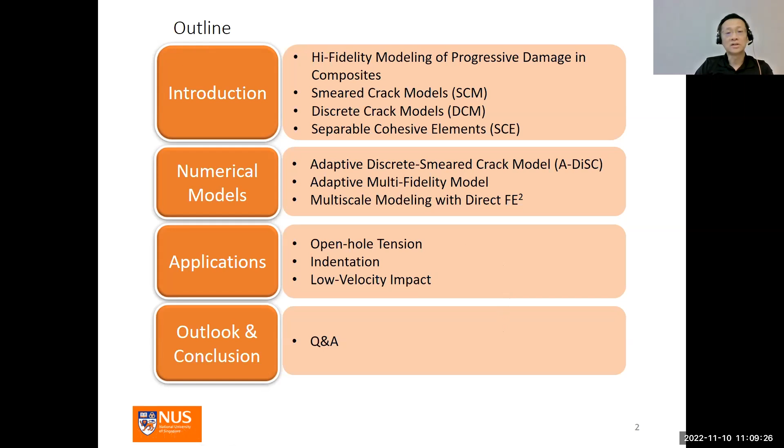Throughout the talk, I will use various examples for verification of the results and the modeling, using examples in open hole tension, static indentation, and low velocity impact of composites. And finally, I will conclude with the outlook and accept the Q&A.

Now, if you look at a typical notch composite specimen, such as an OHT specimen like so, you'll find there are combinations of distinct matrix cracks, diffused, very small but numerous micro cracks, as well as delaminations and possibly fiber damage. Clearly, to capture the physics of these failure modes presents a huge computational and modeling challenge.

If you read the early literature, let's say in the 1980s, on notch composites, you will come across criteria such as point stress or average stress criteria, which are essentially empirical criteria, not really based on much physics. Therefore, for every change in laminate stacking sequence, or an OHT specimen, you will have to vary the critical stress and so-called characteristic length. So for thousands and thousands of specimens, you may have very different criteria. Clearly, this is not a satisfactory situation.

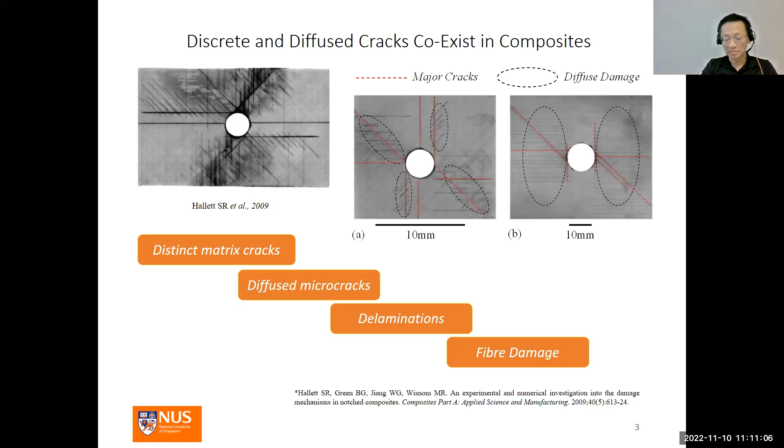Fortunately, our understanding and modeling of progressive damage has improved considerably since then. Our models have also evolved in sophistication, as we shall see.

Most high-fidelity modeling of progressive damage is conducted at a meso or ply level scale, as shown in the middle here. Of course, you have the larger scales at the component and structural scale, the macroscale. And these models are usually modeled using shell or plate elements.

At the microscale, you can explicitly model the fibers and the matrix material. However, these are usually of the order of micrometers.

We can resort at the mesoscale to either discrete or smeared crack methods. The discrete crack models cracks explicitly by splitting or partitioning the finite elements, but that comes with a high computational cost.

Examples of these include the XFEM, the phantom node method, the augmented finite element method, and something which we developed with a group here in collaboration with Professor Pinho from Imperial, the floating node method.

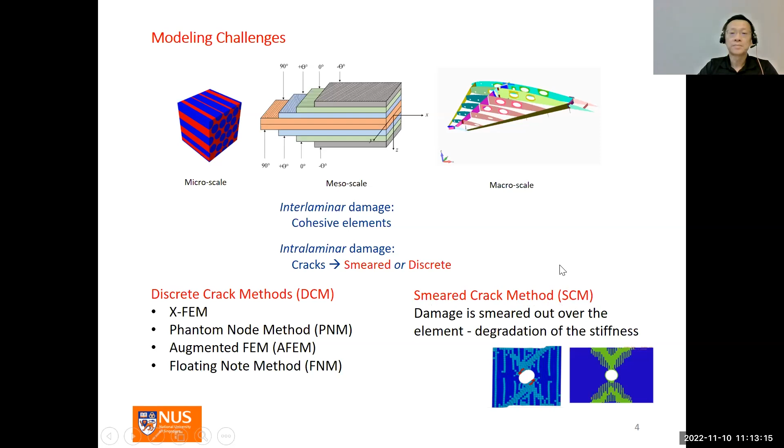Now, the good news is that much of the physics of failure at the ply level scale can now be modeled fairly accurately with high fidelity models such as these.

This is an example where the laminate is subjected to impact and then subjected to compression afterwards. Here, the two specimens are quasi-isotropic in the layout. The only difference between the two, on the left and the right, is the order of the stacking sequence.

The laminates are first subjected to low velocity impact, and then the damage is retained in the model. Then the boundary conditions are changed such that it is subjected to compression.

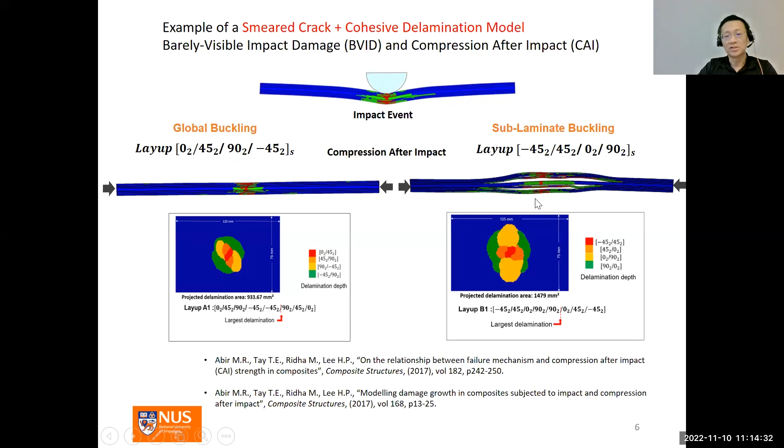So depending on the layup sequence, the laminate on the left fails through global buckling, whereas the laminate on the right fails through sublaminate buckling. And these results can be corroborated with experimental data.

With the development of the discrete crack technology, we can further improve accuracy and fidelity of modeling. Here, we developed the floating node method to partition not only the brick finite elements, but also the cohesive elements.

The floating node method is largely due to the work of my ex-PhD student, Dr. Chen Boyang, who is now a professor at TU Delft. And the work on the separable cohesive elements is largely due to my ex-student, also Dr. Lu Xin, who is now with Shanghai University.

So imagine a finite element model, let's say here on the top left corner of a composite laminate. Upon damage initiation, nodes are seeded onto the brick elements to simulate matrix cracks by partitioning the elements. So the elements here, for example, a partitioned element in this plane, with this will be the matrix crack. The method is called floating node because the nodes float before they're seeded and assigned to an element for partitioning.

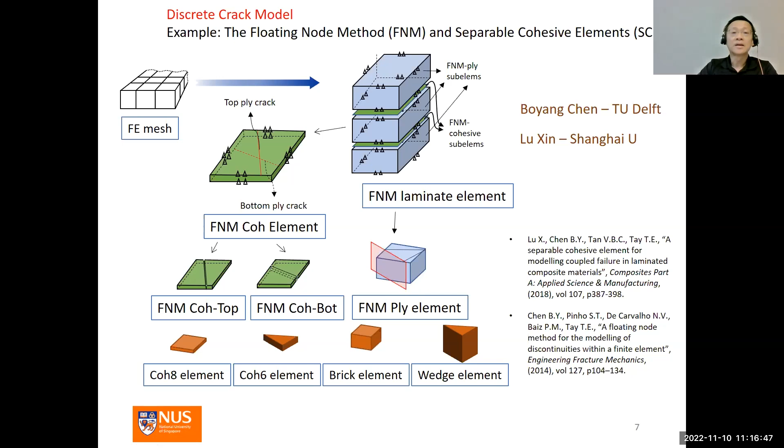The floating node method was successfully used to model cracks and damage in both notched and unnotched laminates. Here, the delamination is indicated by the red-colored areas as modeled by cohesive elements, while the matrix cracks are modeled by partitioning the brick elements in the plies.

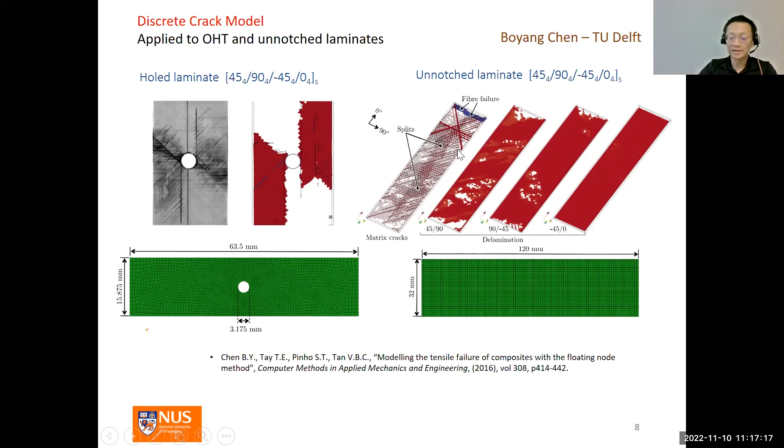We then extended the discrete crack method to model open hole compression. This development involves a geometrically nonlinear formulation, and the work is largely due to my postdoc Jie Zhi, who is also my ex-PhD student. The open hole compression involves an additional failure mode due to sublaminate buckling.

He also applied the code to low velocity impact of composites, shown below here. We can see the classic peanut-shaped delamination pattern and matrix cracks for a cross-ply laminate. We've done it also for quasi-isotropic laminate, but it's not shown here.

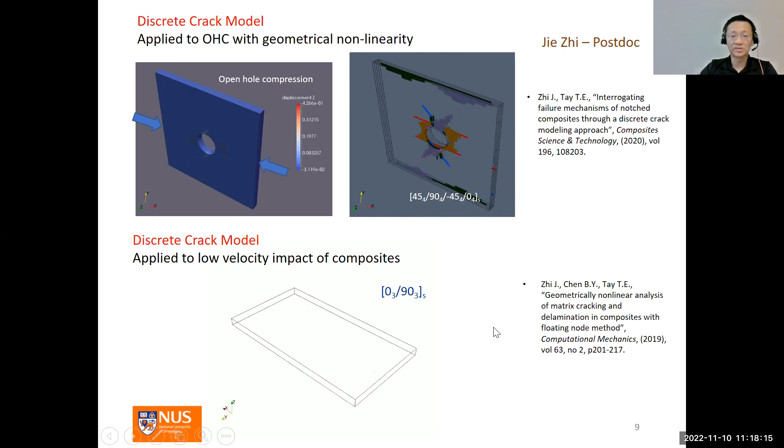So we now have two technologies with different advantages and disadvantages. The discrete crack model is closer to the physics of fracture, but it's computationally expensive, and therefore it's not so practical for application to larger structures.

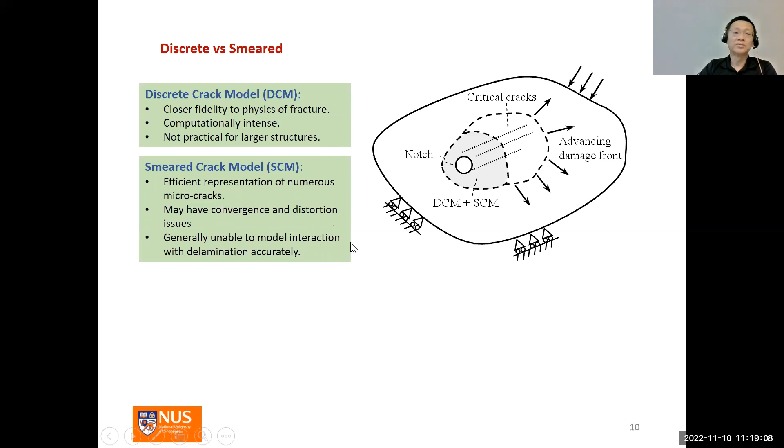The smeared crack model, on the other hand, is relatively efficient, especially when numerous micro cracks need to be modeled. But it may have convergence and distortion issues and are generally unable to model interaction with delamination accurately. So in problems where there is delamination migration, these smeared crack models may not work.

So the idea here is why not combine the best of the DCM and SCM models in a single model. The DCM is only used or activated when damage is actively progressing, and where fidelity to physics is important - it is activated only when the damage is growing. But the SCM, or smeared crack model, can be used when a large number of saturated diffused microcracks are present, or when damage is no longer active and the damaged region can be smeared with reduced stiffness properties.

Clearly, there has to be some criteria for retaining some of the cracks in discrete form and smearing the others. So we call this method ADiSC, first proposed in 2019. The hope here is that it's possibly less compute intensive for larger structures while preserving the fidelity to the physics.

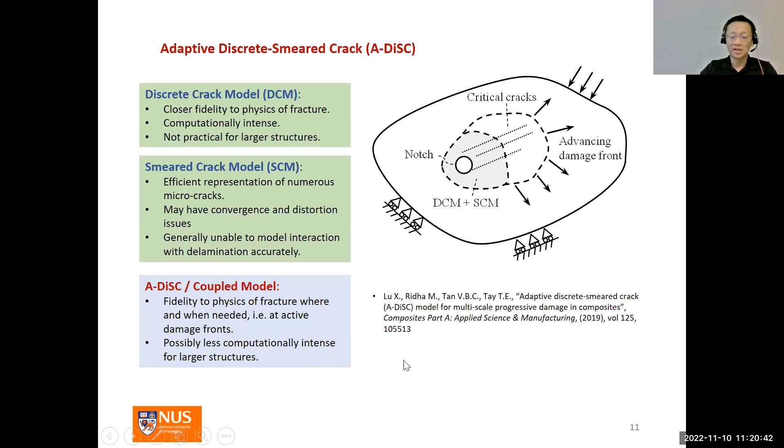More recently, we've extended this idea to include adaptivity with different element types. This has several advantages, and many practical structures are modeled with shell or plate elements.

When failure is predicted to initiate, the surrounding region, let's say, for example, around a notch, may be converted to 3D brick elements, and the discrete crack method may be employed to model the physics of crack growth. When the damage has stopped or reached saturation, the region may be converted back to the more efficient shell elements.

With lower fidelity. So you begin with a shell model, then have a transition to 3D where all the damage takes place, and then when the action is over, you convert the region back to shell. It is hoped that this will improve computational efficiency without sacrificing fidelity to physics.

This work has just recently been published this year. Of course, when it comes to implementation, the devil is in the details, as I say.

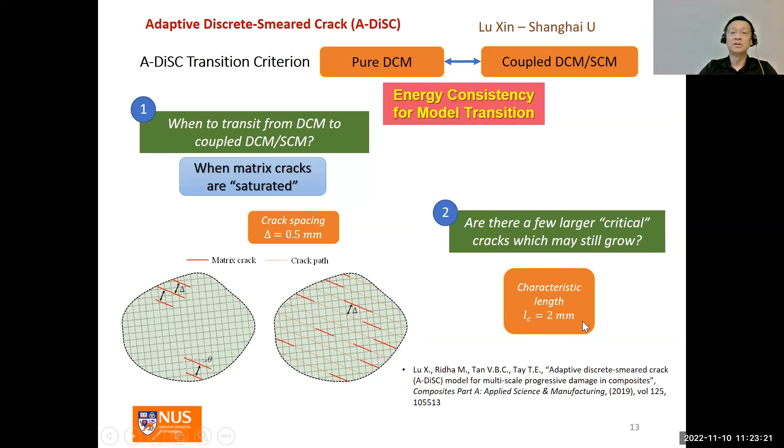So these parameters have been studied in greater detail in a paper. I'd like to demonstrate this approach in an OHT of a quasi-isotropic laminate, for which experimental results are well documented by a paper from Steve Hallett.

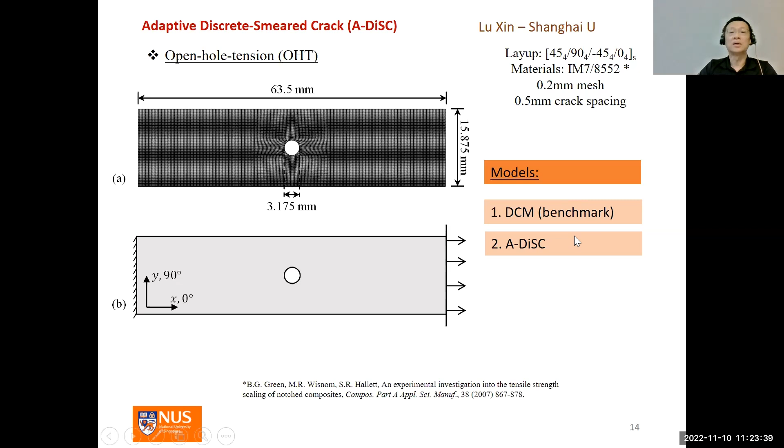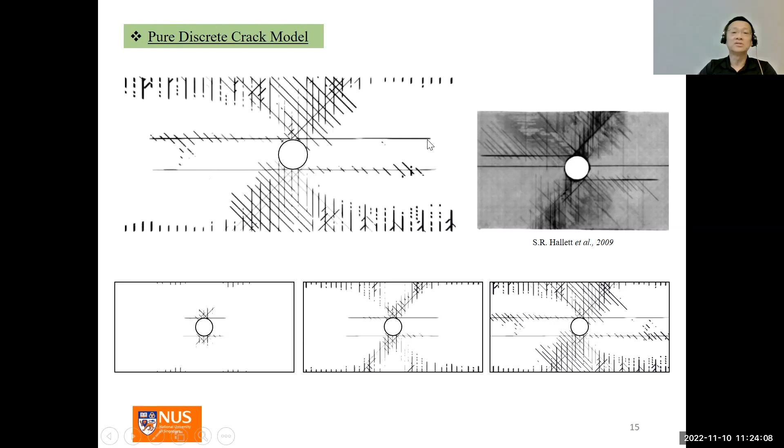Here, we show the modeling with the full 3D discrete crack model, and on the right is the picture of the experimental results from the paper. Here you can see that the elements are partitioned, and the cracks show a longitudinal split at the 0 degree ply, like so.

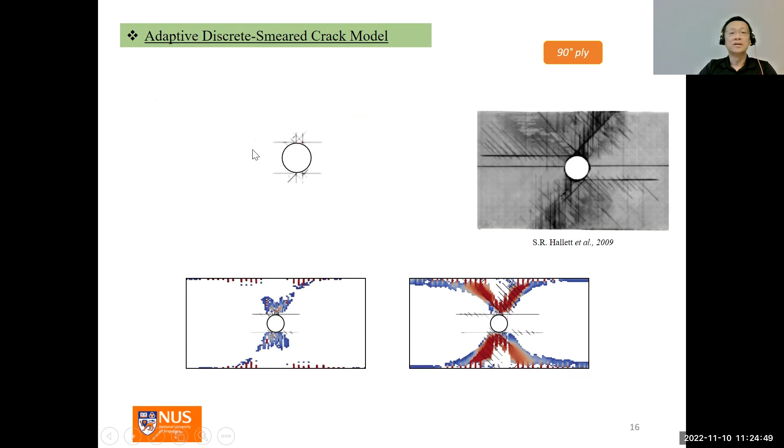In this slide, we show the model with the ADiSC method. Some of the matrix cracks, for example in the 90 degree ply, have reached saturation and stopped growing, and so have been smeared - the colored regions are the smeared region. However, you can still see that some cracks are still retained as discrete cracks because they continue to grow, particularly the large longitudinal splits that you see here.

This is also the smeared regions for the minus 45 internal ply.

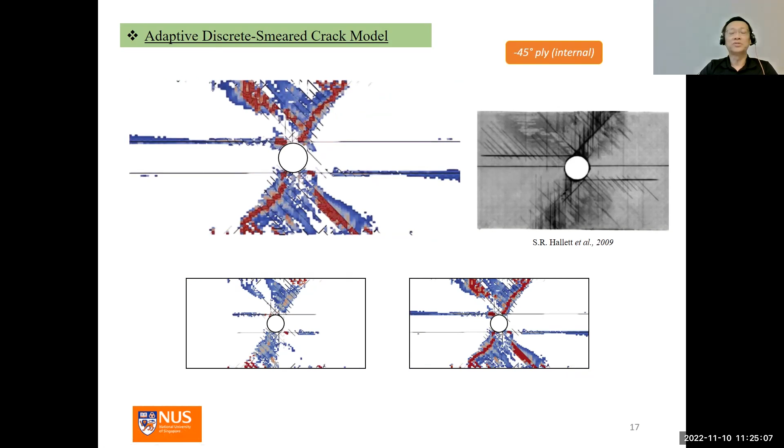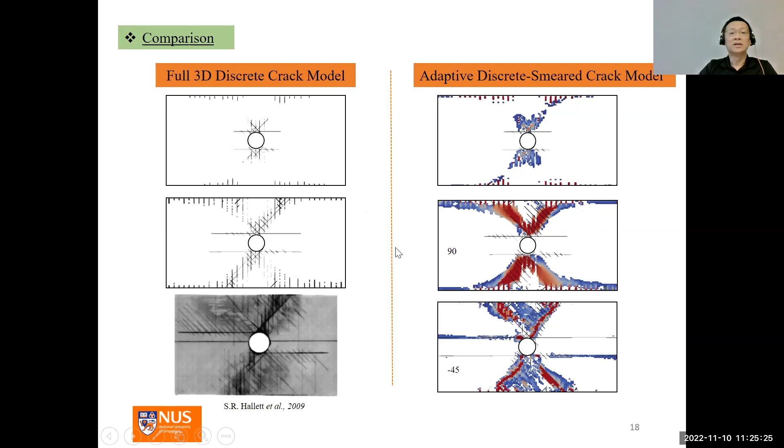This slide shows a summary of the final comparison between the full 3D discrete model and the ADiSC prediction on the right at various stages of crack growth.

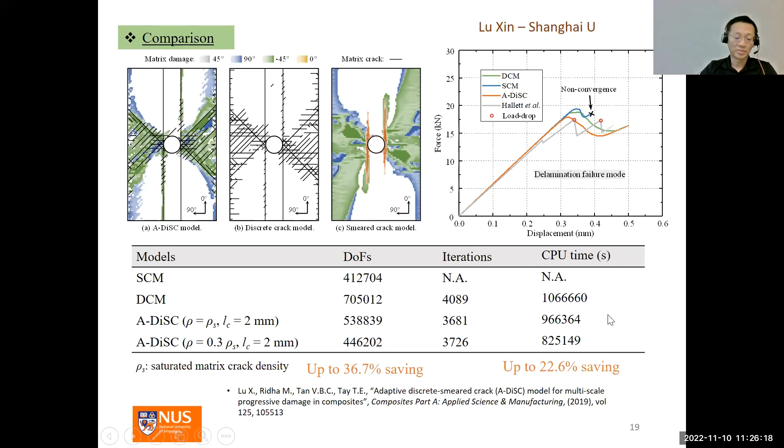It is worth noting that the pure SCM smeared crack model failed to converge, even though we do get the maximum load peak here. So using the A-DiSC, it is possible to get maybe about 30% of computational saving.

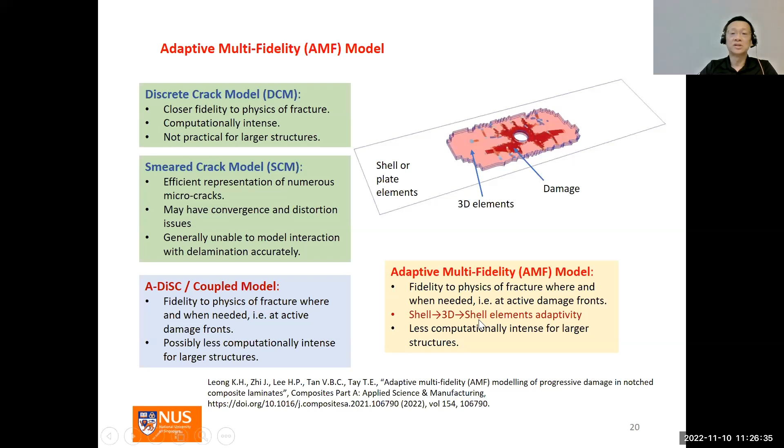As I've said previously, we can further improve this A-DiSC model with adaptivity using different element types, transiting first from shell to 3D elements, and then back to shell. In this slide, we show the...

Same open hole tension specimen. However, initially the elements in the white region here are all shell elements. Then when damage is predicted to occur around the hole, the shell elements are converted, transited into 3D brick elements, denoted by the pink region here.

Then damage progression is allowed to proceed with the discrete crack modeling. And then when the micro cracks become saturated, the region is converted back to shell elements with smeared crack properties, denoted for each ply with different colored regions. For example, here the 90-degree ply smeared regions are denoted in green, the -45s in blue, and so on and so forth.

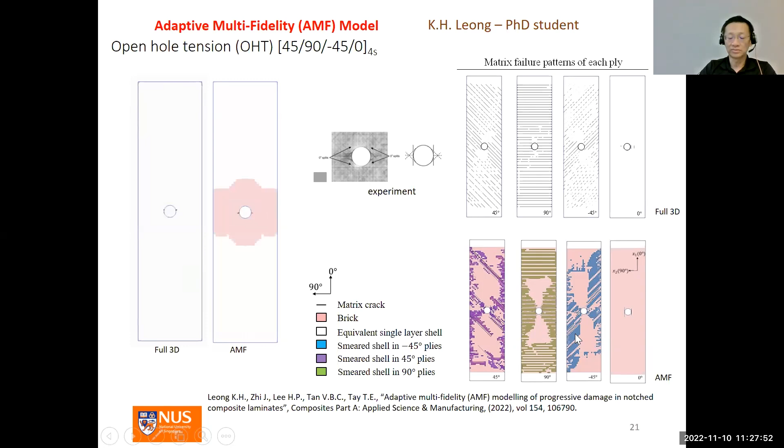This is a similar OHT specimen, except with blocked plies. So there are 4 of each ply here, like this. This kind of specimen has a greater tendency to delaminate.

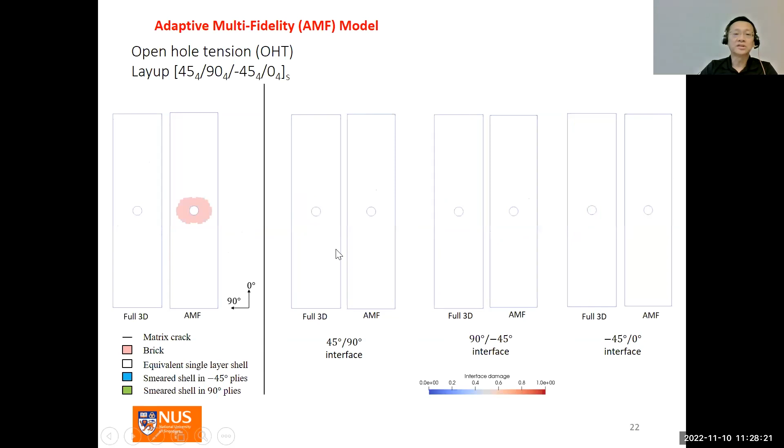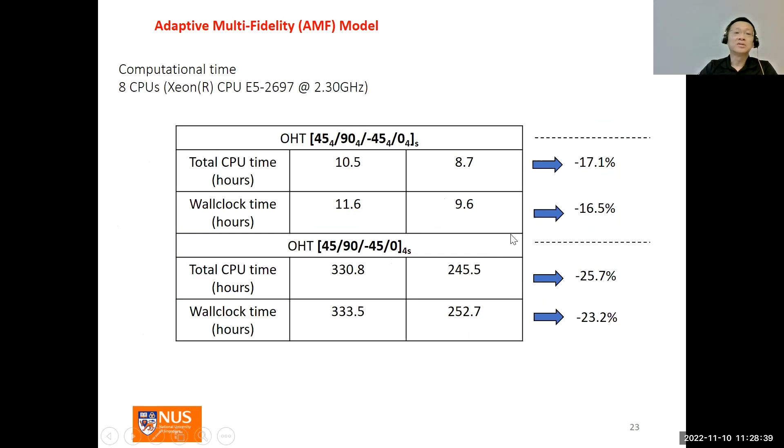So in addition to modeling the matrix cracks, you can actually predict the delamination growth at the various interfaces, as shown in the pictures with the red regions here. So there can be further savings of maybe about 20% in computational time.

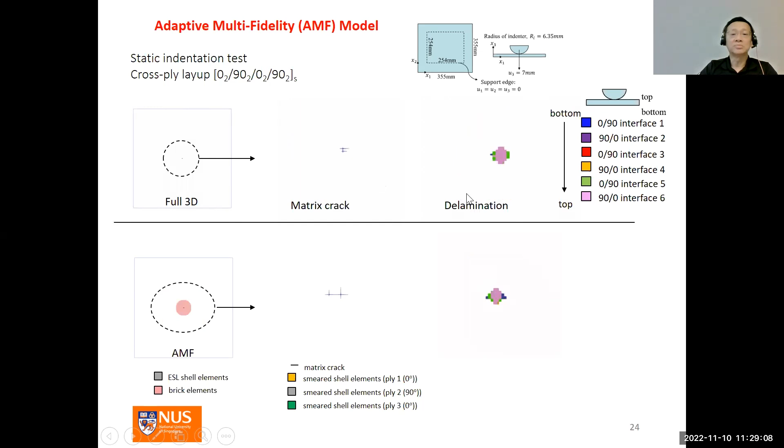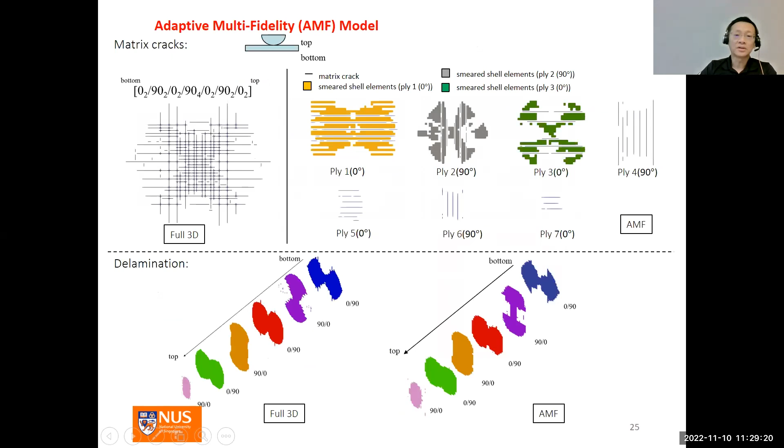We have been applying this multi-fidelity model to static indentation. For example, here, this is a problem with static indentation. The top picture is a full 3D discrete crack model with the matrix cracks and delamination prediction. The lower one is the multi-fidelity, adaptive multi-fidelity prediction. The savings in computational time for these models is a little bit more, about 50%.

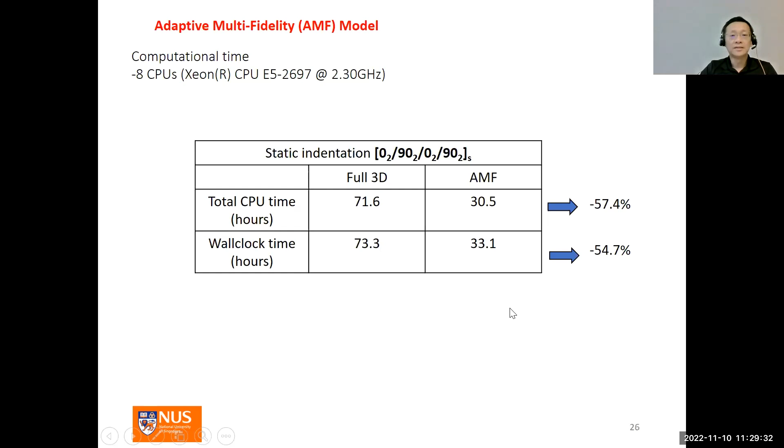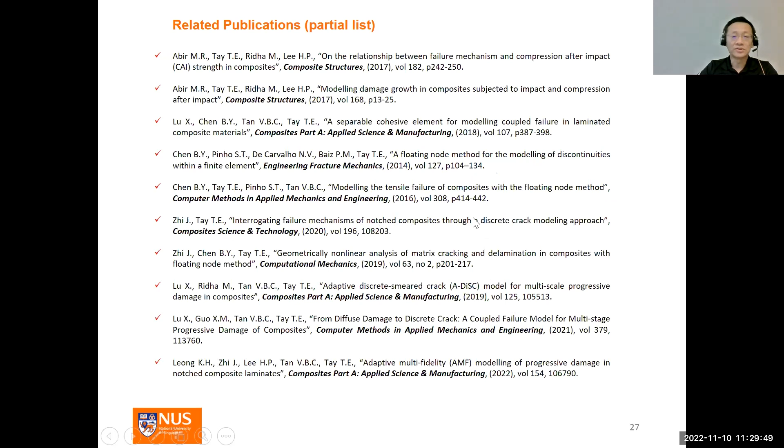So these are some of the related publications for the work that I just mentioned. This is a partial list. If you are interested, I am happy to give you more references on this.

Now I'd like to talk about a technique called the Direct FE2. So far I've been talking about modeling progressive failure at the meso and macro scale. I'd like to share this technique, which we've been working on lately, that enables us to concurrently bridge the microscale and mesoscale in a single analysis or single model.

The Direct FE2 idea is largely credited to my colleague, Professor Vincent Tan, who found a clever way to perform FE2 without having to write very complicated codes. Very briefly, by replacing the homogenized material properties of a macro finite element with RVEs of the fiber matrix composite at the Gauss point, we can perform the multi-scale analysis in a single step, single model.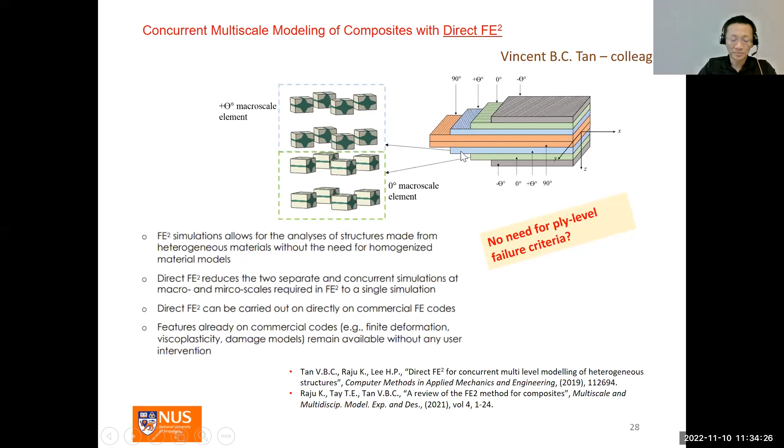So we've actually coded the direct FE squared in a shear flexible beam element in Abaqus. This work was largely done by a PhD student, Kirk Ming.

Here we have a macroscale beam element like so, with two Gauss points. At the Gauss points, we have a mesoscale RVE with fibers coming out of the plane. Here we can have the strain energy equivalence, which gives the scaling factor that has to be applied to the RVE. This is the magic sauce that I mentioned just now.

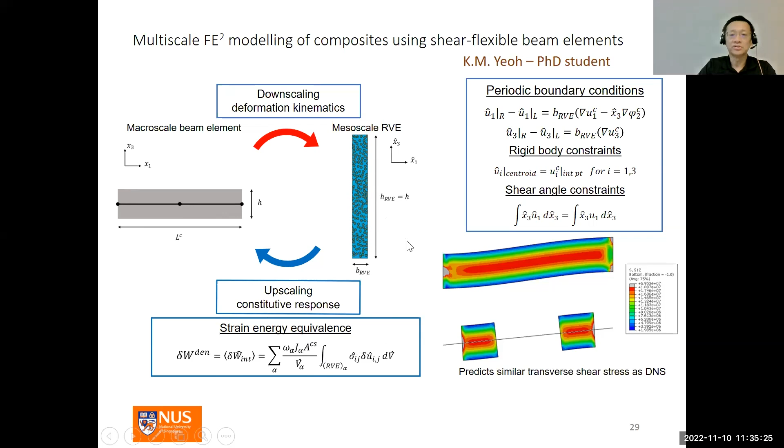This animation shows that the deformation of the direct FE squared model is similar, and the stresses are similar to that of the direct numerical solution model, which is basically just a very large finite element model of the whole beam. And it's possible to show savings in computational time compared to the DNS model as well.

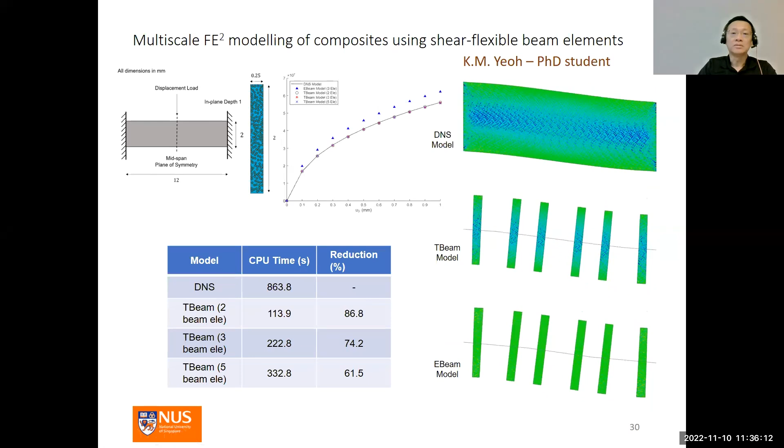Here in this slide, we applied the direct FE2 model of a foam core sandwich beam under bending using layer-wise Timoshenko beam elements. We have three beam elements here, and the middle one represents the foam core. This is the DNS, the direct numerical solution model. Although it appears like a block of gray rectangle, it's actually a very fine finite element mesh. Below here is the layer-wise beam element.

Each of these strips represents the RVE, the representative volume element, at the Gauss points. This is what the RVE looks like. The problem is a sandwich beam with steel face plates and a foam core. The interesting thing is, if you look at the deformation of the voids, you can see that the deformation of the layer-wise Timoshenko beam and the DNS deformation is similar.

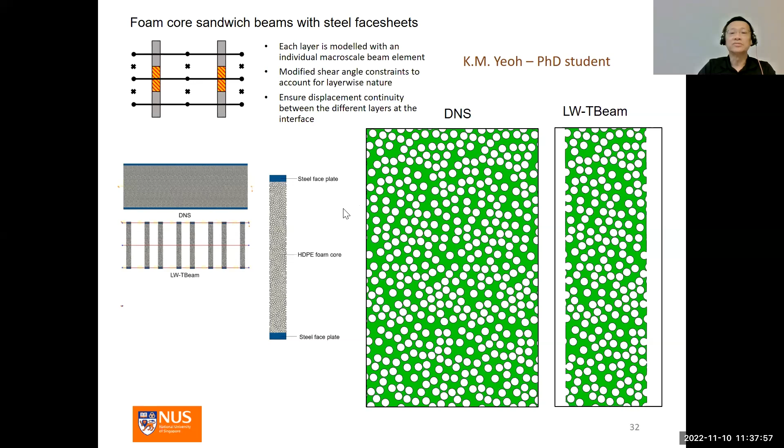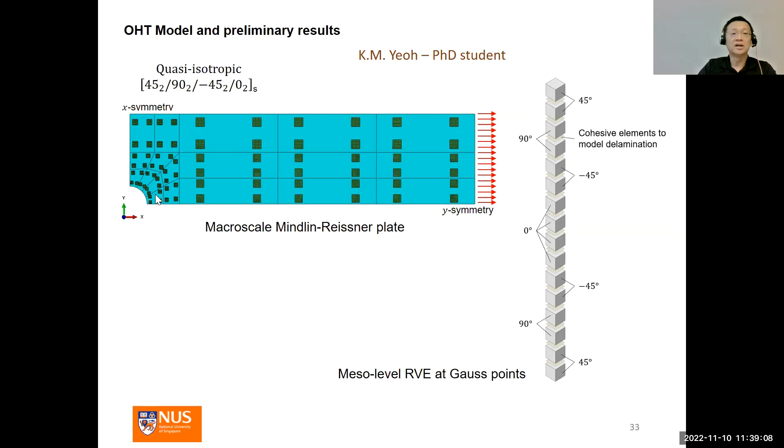We have begun to model the damage in open hole tension. This is still very preliminary work, using a very coarse macroscale finite element mesh, and in this case we use a Mindlin plate. In each of these plate elements there are four Gauss points in which we place the RVE. The RVE is a stack of plies with cohesive elements inserted between each of these plies. The idea is to see if this FE2 method can predict the delamination failure at the cohesive elements of the RVE at the Gauss points, or at least very close to the hole edge.

The animation has stopped working, but anyway, it's supposed to show the cohesive elements with colors indicating that possible delamination has occurred in some of the interfaces. So the picture here actually shows only the cohesive elements of the RVEs; the blocks of plies are not shown here.

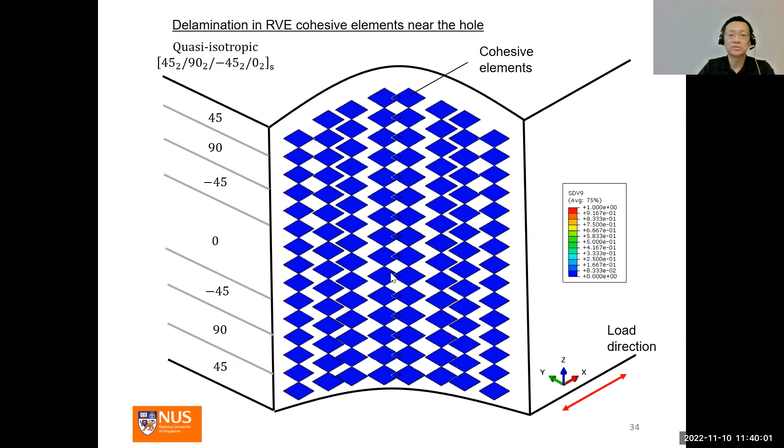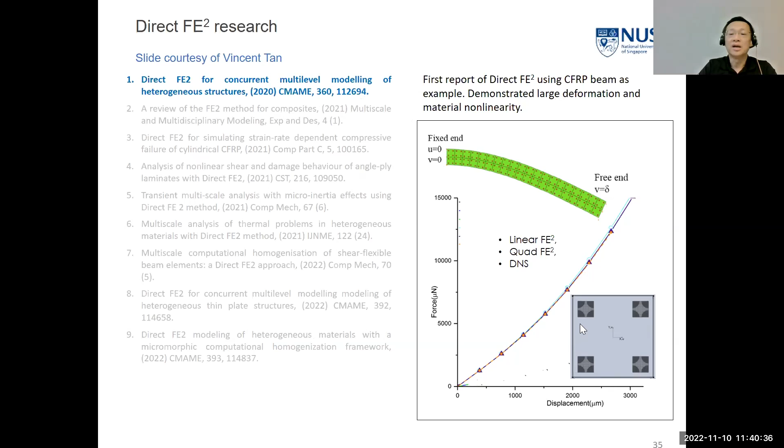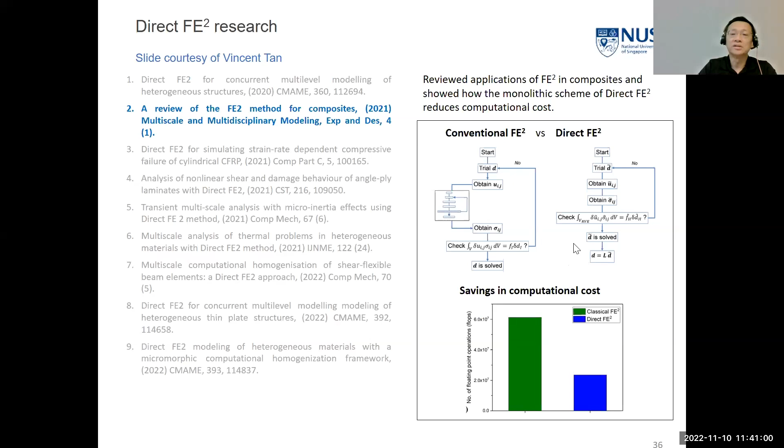I'd like to briefly talk about the other work we've done in Direct FE2. These papers are arranged in chronological order. The first report of Direct FE2 using a CFRP beam demonstrated large deformation and material nonlinearity, showing the deformation of a beam and the RVEs at the Gauss points. Then this is a review paper outlining the difference between conventional FE2 and the direct FE2 method. This paper also shows that there can be significant savings in computational cost using direct FE2.

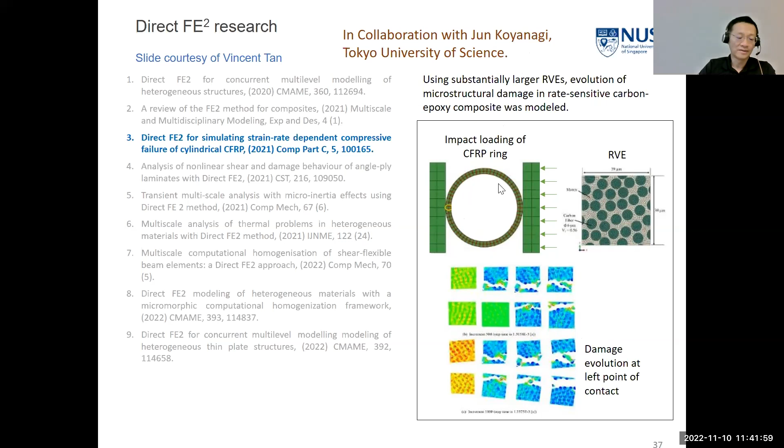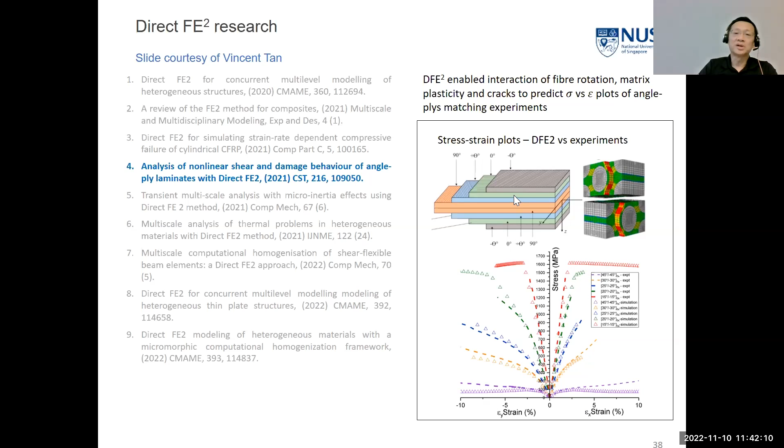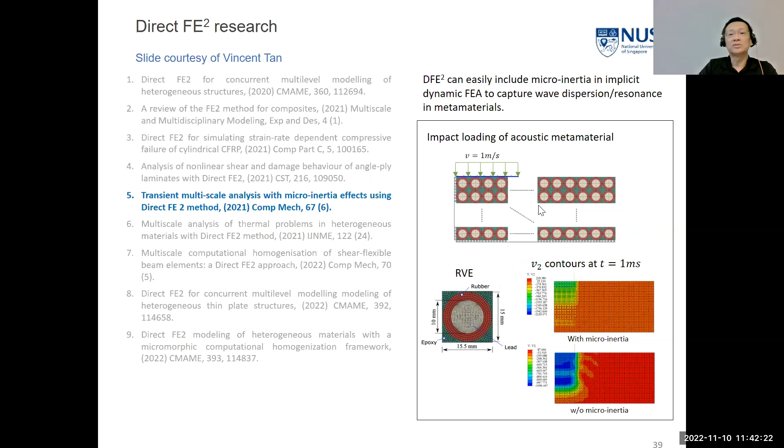This one is a paper on predicting the stress versus strain plots of angle ply composites. This one is the application of direct FE2 to model micro inertia in a dynamic problem. And this one is the coding for shear deformable beam elements.

Okay, so those are some of the papers we've published relevant to direct FE2. In conclusion, I have presented several techniques for modeling progressive damage in composites at various length scales, from the micro to the meso to the macroscale. These techniques have varying levels of fidelity and accuracy, but come with computational costs. However, by coupling some of these techniques and introducing adaptivity, it is possible in principle to bridge the length scales in a single model or analysis.

A problem in composites is the transferability of results from one scale to another. For example, it's difficult to directly use the results obtained from OHT tests to model damage in larger components.

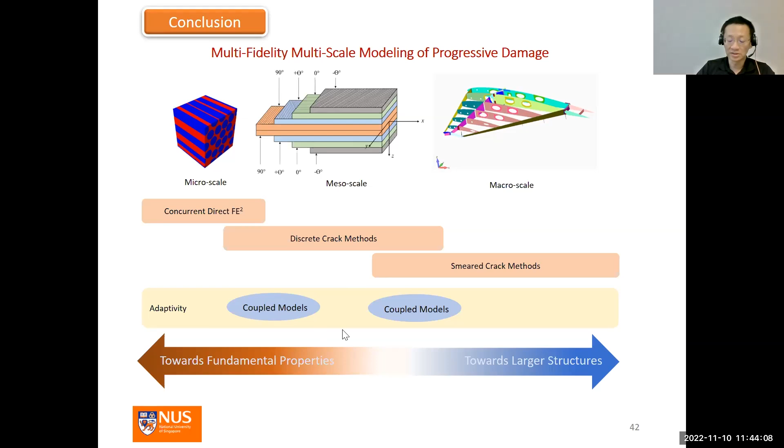Similarly, it's difficult to use the results from micromechanics directly, even applied to composite coupons. So an integrated simulation model may help overcome some of these hurdles. Ultimately, the goal is to accurately and efficiently model progressive damage in practical large composite structures using more fundamentally derived material properties at the micromechanics or even lower scale levels. This goal probably remains a dream at this point in time, but there's hope that advances in multi-scale and multi-fidelity modeling are inching closer towards it.